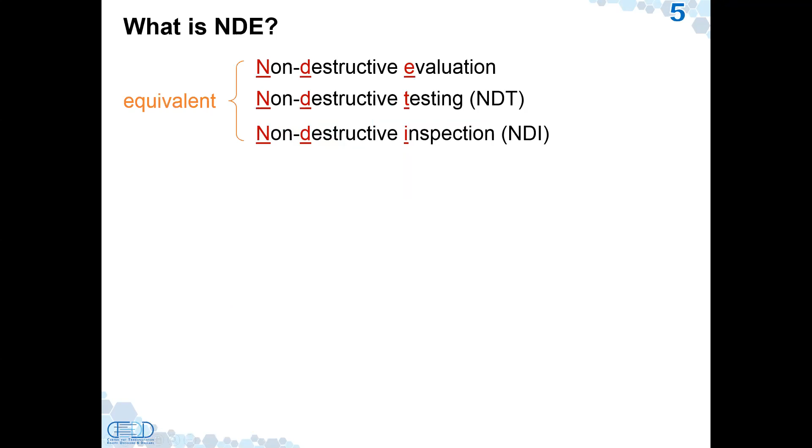For those who are not familiar with NDT technology, in my NDT class I introduce a little bit of background on NDT. What is NDE? Many people see NDE, NDT, or NDI - these are all the same concept, which is looking at damage or deterioration without damaging the material, like we do at the hospital. At the hospital we look at the problem - for example, a sonogram from my 8-year-old boy, or taking an X-ray, or some people use MRI for the human body.

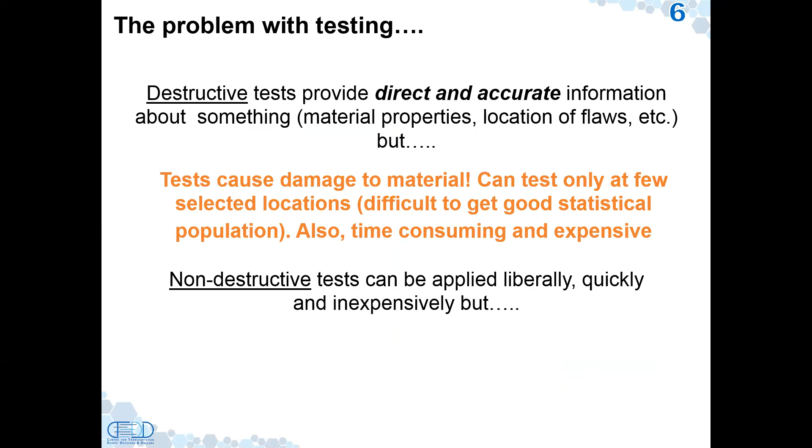Instead of the human body, we are looking inside infrastructure for deterioration using similar technology. Like at the hospital where people use blood testing, there's a lot of destructive testing methods too - 20 years ago I worked at a consulting company that used coring and other destructive testing methods. We also have non-destructive testing for infrastructure, similar to X-ray or MRI.

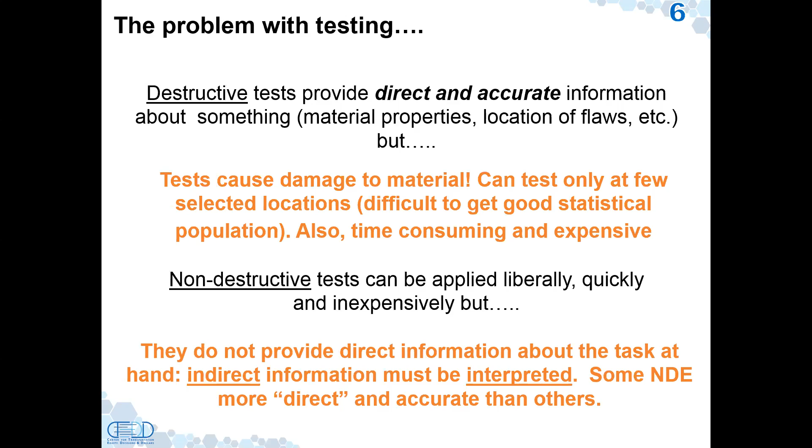So we investigate using these methods. These are our goals from our laboratory: we use advanced inspection technology to find deterioration, and using information technology, we share all the data and communicate with other stakeholders, or collaborate with other researchers.

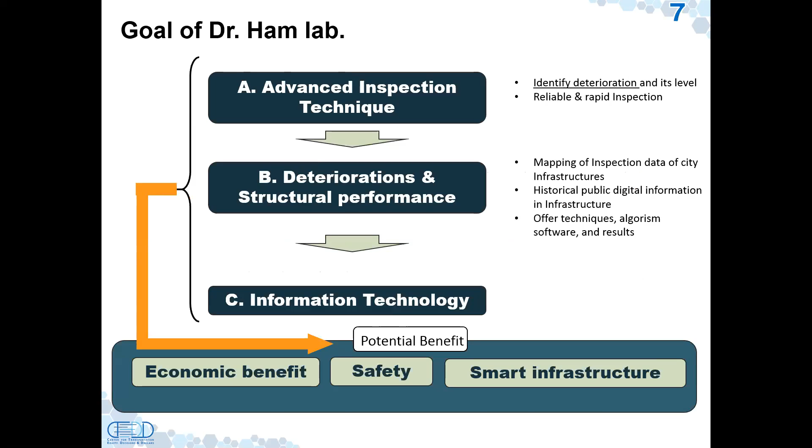These are our goals, and this project and my expertise fit into the three focus areas from CTEDD - for example, we do maintenance for transportation infrastructure, and we use remote sensing systems and information technology, which I will show you today.

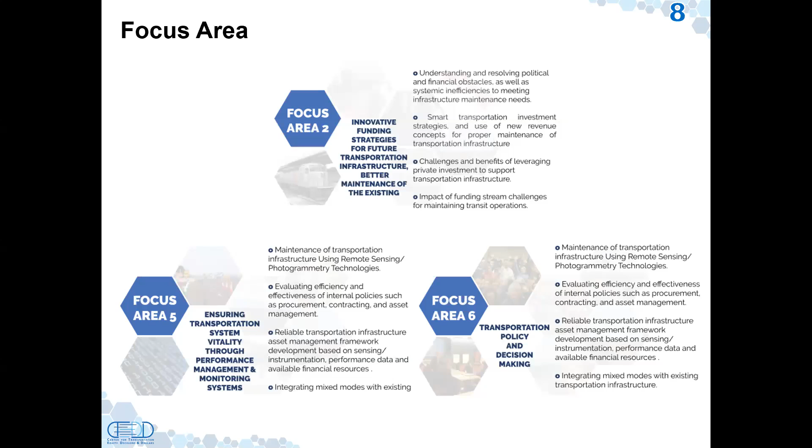And there's many topics fitting into these three focus areas, so I'll address those topics as well. And also, it's important these days, in the current project I have, looking at the deterioration or evaluating the pavement or bridge, because the stakeholder needs to know at the right time, because we don't want to overestimate or underestimate the pavement evaluation or bridge. Then you lose $1 billion, not $1 million, a $1 billion loss. So to avoid this kind of economic loss, we need the right-time assessment. This is kind of the initial motivation.

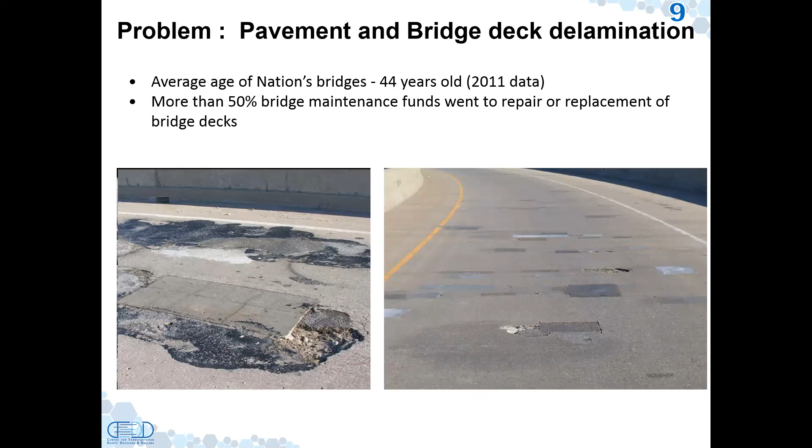So what kind of damage are we interested in these days? These are pavement evaluation and delamination of the bridge deck. Most of the damage issue in the bridge deck is delamination. This results from delamination caused by corrosion, mainly of the rebar. So look at this here, a pothole, or many kinds of damage out there. But most of the cases we see here are hidden cracks, which are called delamination, horizontal cracks. Again, this is caused by corrosion.

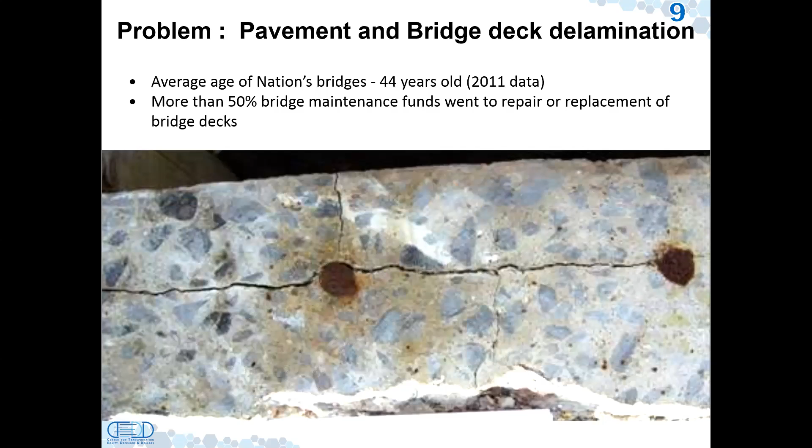So if you look inside the crack, many technologies try to do it with image processing or other technology, but they're not able to see inside this delamination. So this is the kind of impact of innovative technology: how we can inspect such hidden cracks. And delamination is the most critical problem in the bridge deck anyway.

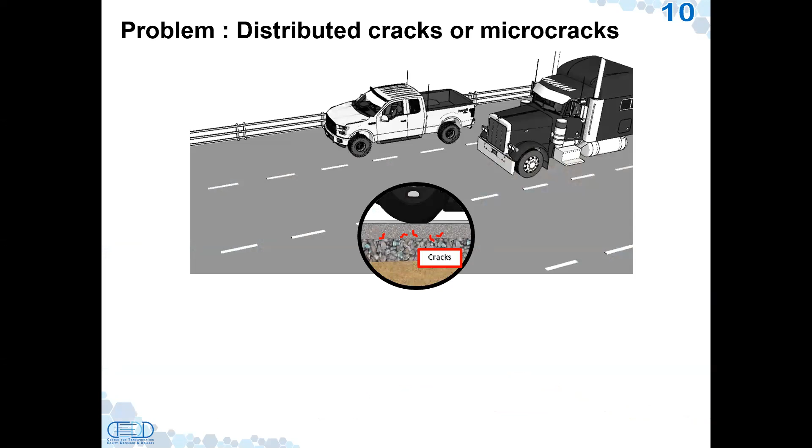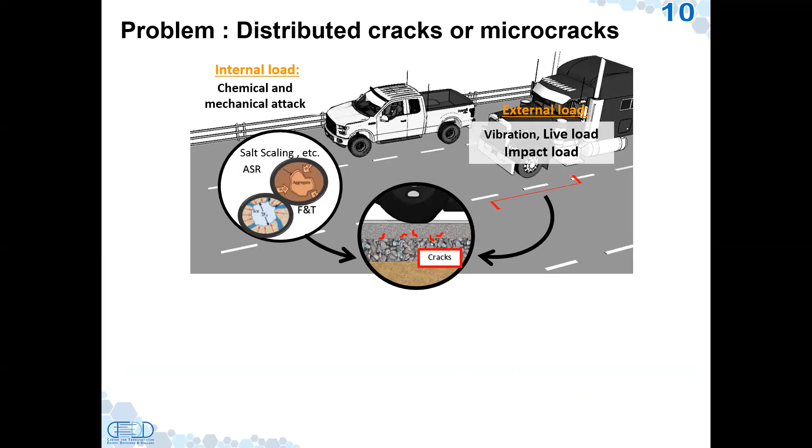And there are a lot of other macro or micro cracks on transportation infrastructure, for example, cracks caused by external load, vibration, and also chemical attack from ASR and freezing-thawing. For example, in Illinois there are a lot of freezing-thawing problems, and Texas has ASR and other salt scaling problems. So most times when I teach the PhD deterioration class, I call this the Fantastic Four, like the Marvel characters, because they really work as a team, and they kill the infrastructure anytime. These are a very good example of ASR cracks.

But of course, we don't want to find this kind of last stage, like you don't want to find a tumor at the last stage when it's too late and it's time to replace. So we want to find the early stage so you can fix it, or have a new strategy, or change the policy, so we can help our society's infrastructure.

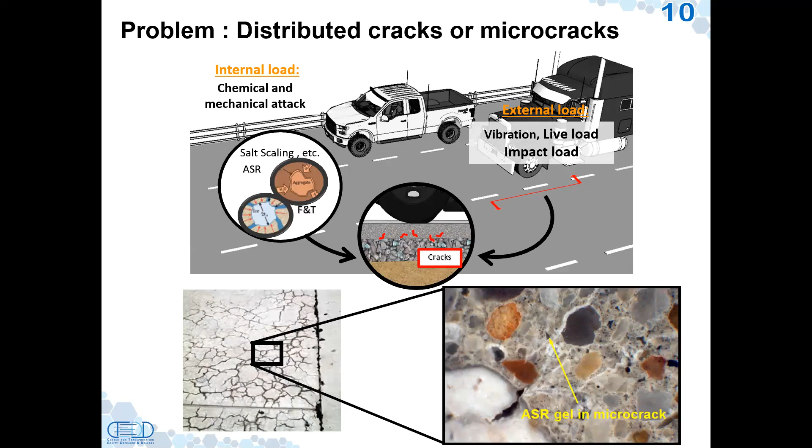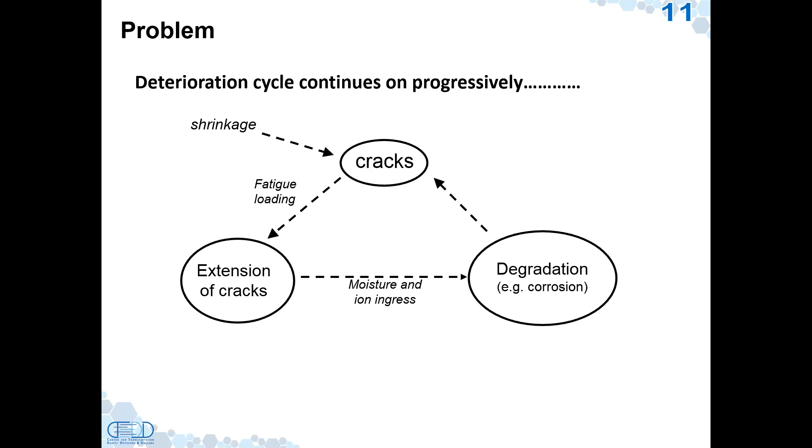So again, many people say the micro crack doesn't have a really significant impact on structural performance. Yes, that's true. However, if you look here, this deterioration cycle continues to progress. Like the Fantastic Four, they have teamwork, and then they have boosting. For example, if you have an initial micro crack, it allows chloride in, so the chloride ion boosts your corrosion, and then you have large delamination, and this delamination causes a pothole or vertical crack, and more cracks, and then it gets worse.

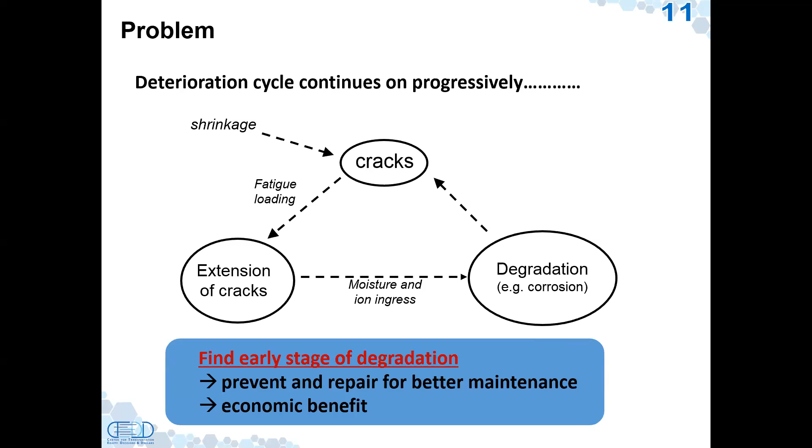So, like I said, like finding an early-stage tumor, we want to help find the early degradation, because you don't want to lose $1 billion on a wrong replacement, or be too late and have to do more and spend more time. That's why in most of my projects here and in other state DOT experience, they really need accurate maintenance data so that we can help.

So what is current technology doing so far? We have this, called chain drag impact. This is one of the commonly used NDT technologies to find delamination, chain drag. This method looks like an inefficient way, but it's the only way in state practice to find this damage. Of course, many people also try other advanced technology, but that's very slow. And this is still, believe it or not, a popular and common method among DOT people.

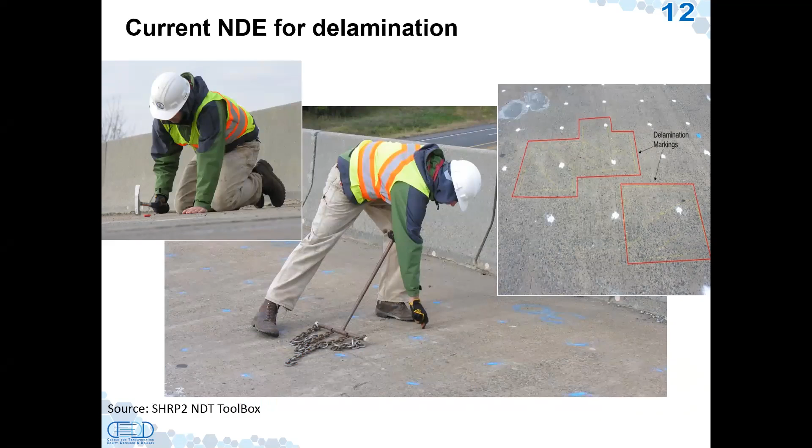So these are the challenges. For example, if you want to look at billions of concrete cross-ties or rail, or you have large infrastructure, and the method is not repeatable, not sensitive, and not fast, then you want to use some fast scanning system, maybe like an MRI system, and you also need some very sensitive method to find the crack.

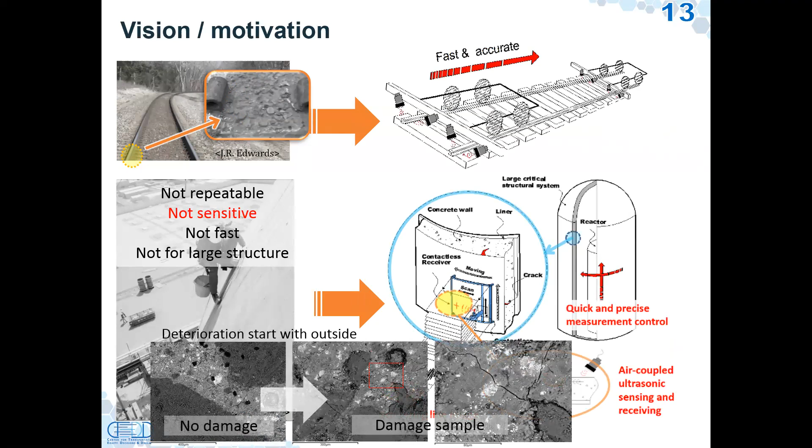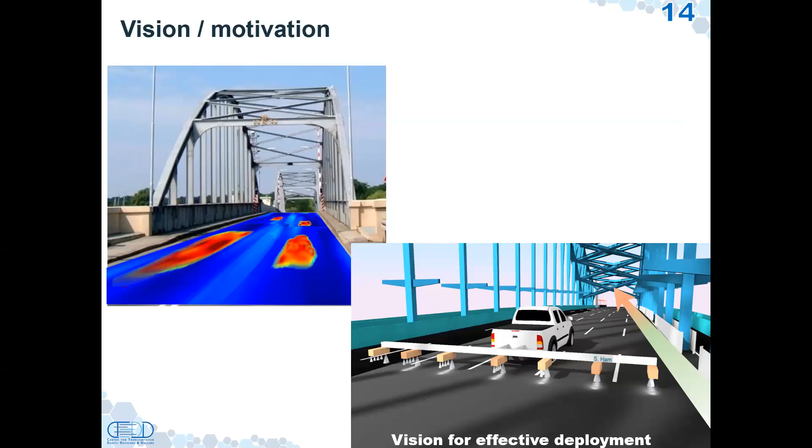Or somehow you want to profile with some rapid scanning system so that you don't have to close a lane, and you don't want it to miss any kind of crack. If you close a lane, you also have economic loss anyway. So you don't want to overestimate or underestimate, and you don't want to close the lane. So these are kind of the motivation.

We invented the one-side air-coupled, non-contact system. I'm going to spend 5 to 10 minutes on the background of why we chose the CTEDD technology, the project here. So this is the motivation: this extends my NSF project. How we got this NSF project, what topic we extend, and what research gap we still have to address.

The NSF project is a very deep-understanding research project, but CTEDD is more about connecting this academic research area to the stakeholders to use this technology. So I'm going to spend 5 minutes on the content of our previous NSF project and why we continue to study. Okay? So basically there are two reasons we got this NSF project.

At the time we wrote the proposal, there was no technology for a non-contact system. As I explained, you need a non-contact system; you don't want to contact the sensor every time you want to evaluate the entire system. Of course, many people use image processing and other non-contact systems, but those focus only on outside features, not the inside. And the inside is impossible.

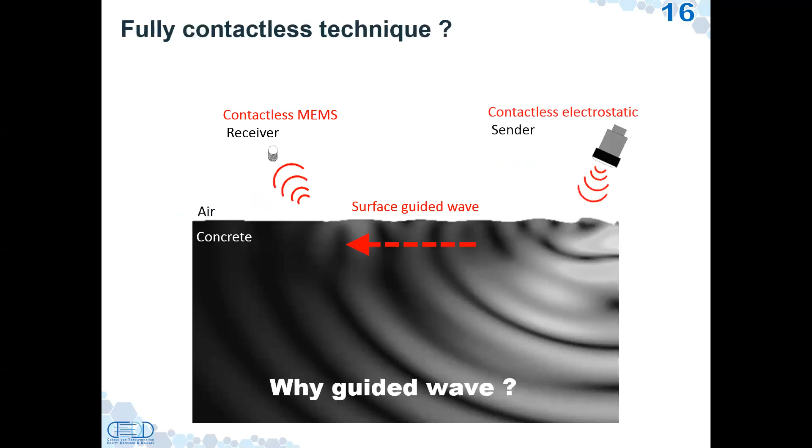That's the reason the reviewers chose this proposal: it's a very innovative, non-contact technology, which means we send the mechanical wave without touching anything, so we can evaluate the inside of the concrete or pavement. I want to skip a lot of this, but I'll just show you how we can do it. At UTA, we also develop and manufacture all the sensors here.

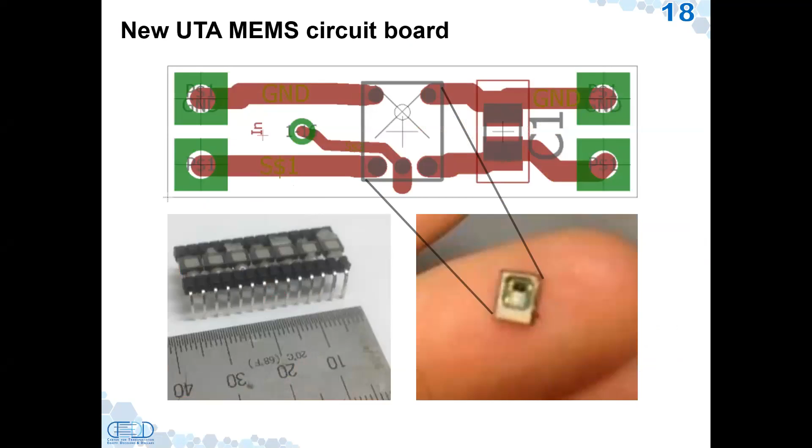Another reason we got this NSF project is that, although we have a non-contact approach, we needed an advanced and reliable crack measuring system. For example, many NDE techniques need a reference technique. In many field areas there are a lot of unknown cases: if you get a value, is that really the true damage index, or really the true crack volume?

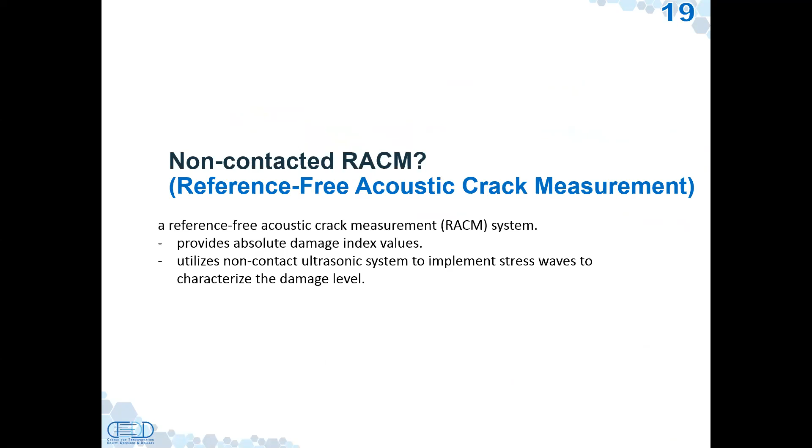So we really needed some kind of reference data, so that without any reference, if you just get the value, you can say this value indicates severe damage or not. That's why we wanted to develop this. For example, there are a lot of damage types here, which I took from different DOT projects, but let's focus on micro crack, macro crack, or distributed crack.

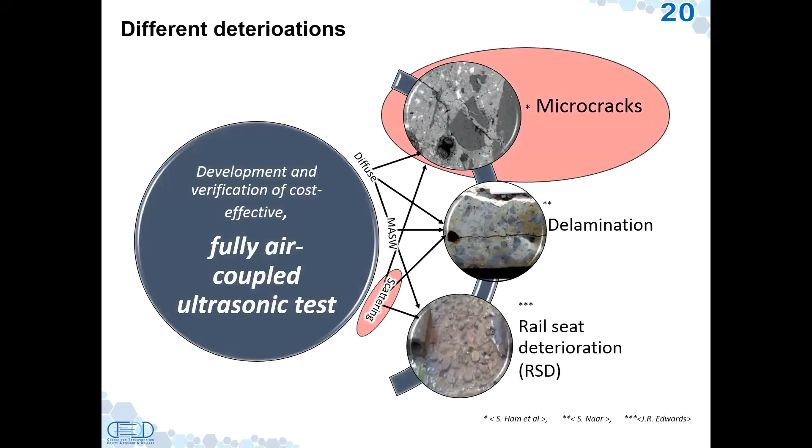If you look at this crazy inhomogeneous medium, let's say we have random cracks. I'm not going to explain all the mathematical equations, just roughly. Let's say this gray color is a little micro crack. We can detect the macro crack, but the micro crack is challenging because we want to find all the damage states. Usually we use a low frequency, which means large wavelengths.

Think about your bread flour sieve. If you have a large sieve, you can easily filter all this flour, but at the same time you cannot detect fine flour. Same thing: if you use a high frequency, which is a short wavelength, you cannot even propagate any mechanical wave through the concrete. It just goes away and scatters a lot. So we have to use large wavelengths.

And I want to scan small cracks. That sounds like it doesn't make sense; they contradict. Like diet chocolate cake. People believe diet chocolate cake doesn't work, but this proposal is an effective diet chocolate cake.

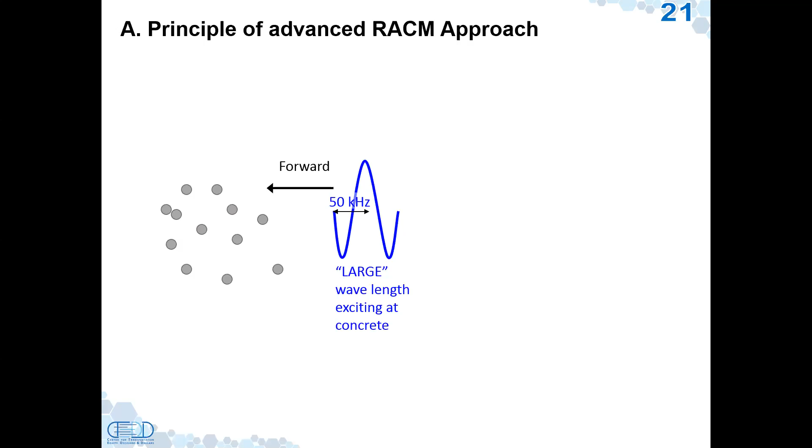So anyway, you don't have to remember all of them. You can remember just effective diet chocolate cake. I never use the diet chocolate cake in my proposal, but this is a good parable for steps. Anyways, all you can remember here is it looks physically impossible, but we can extract any kind of crack regardless of the aggregate type or concrete, whatever inhomogeneous medium. You can extract the crack from the infrastructure system.

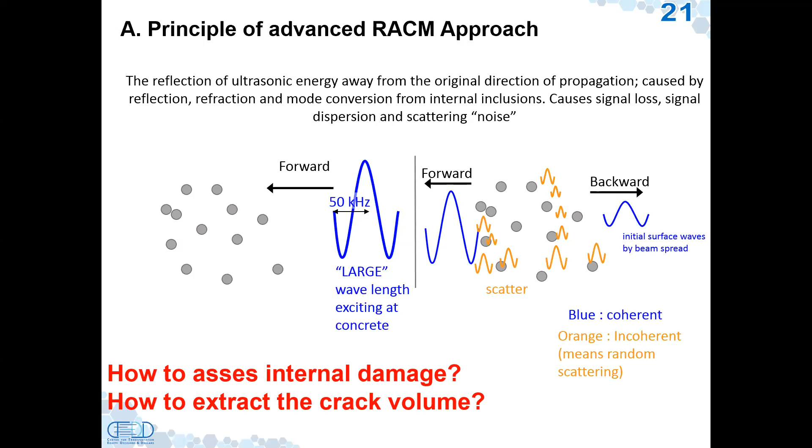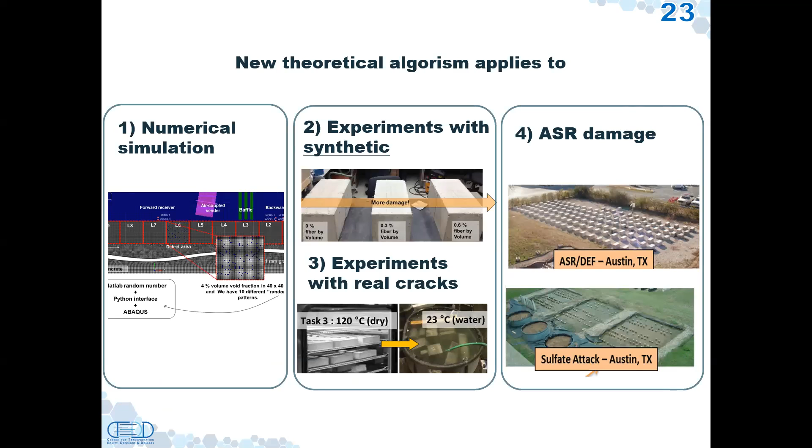So let me skip all the mathematical equations, but this is a part of my NSF project, and in less than 3 minutes I'm going to finish my preliminary results. Then I will start with our main CTEDD project. Before I start the CTEDD, we do have many kinds of studies using RACM technology. We do some FEM simulation and synthetic damage cracks, and also we have a lot of laboratory experiments here. The whole point is numerical or laboratory testing and some real ASR crack samples here.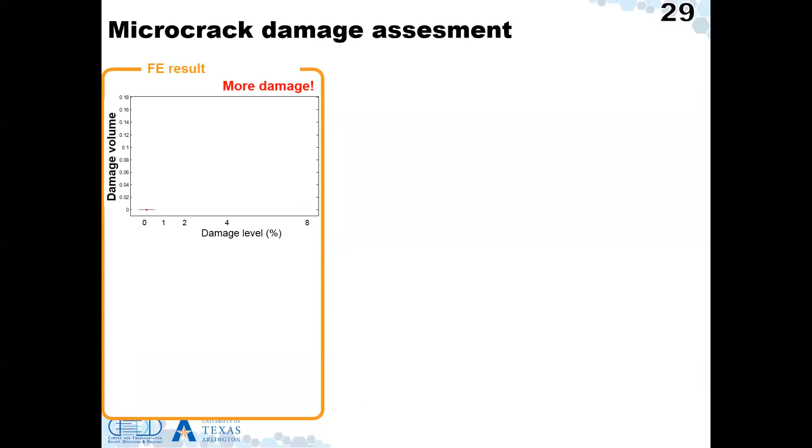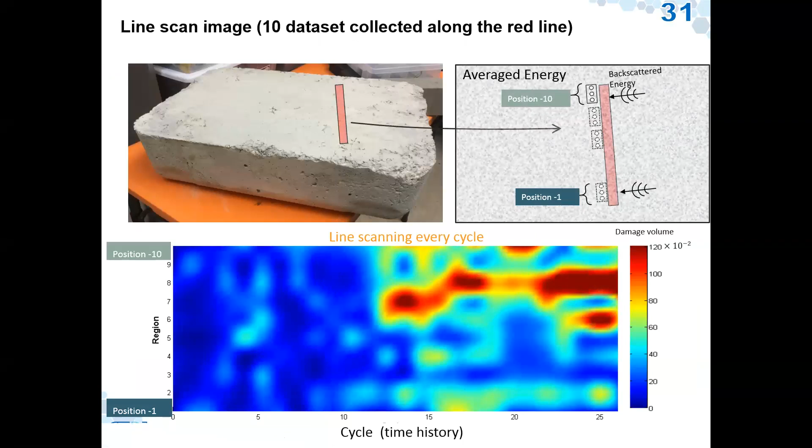All the results were good: we have a very low damage level, not the severe level, where other NDT cannot detect this crack, but we can detect this crack and extract the volume. That's the conclusion. And also we can scan the entire slab, then you can see the color indicating crack volume. The red color indicates more crack, and you can see the 0 day. And if it deteriorates more, you can see it popped out, and then more damage shows here.

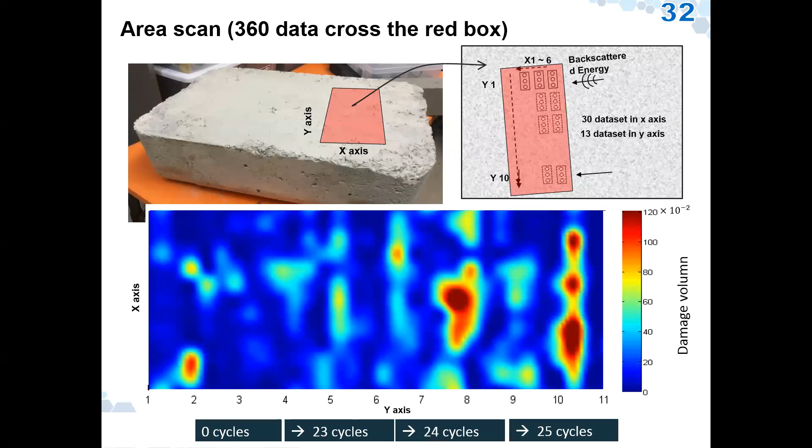So this is a really good application. Stakeholders, remember that we can use this technology for bridge decks or pavement. You can see all the time history of how this crack developed. And we can also give this data to other people, for example planning people or strategy people. They can use the time history for prediction and other technology in other systems. So anyway, this is the motivation.

Although we successfully finished our NSF project, there are several questions I have from this project. I want to share this technology so that everybody can use it. And also, no technology is perfect. We still have to improve it, but how can we improve? For example, what about the aggregate effect? How can you handle this aggregate effect? The conclusion is, regardless of aggregate type, you still get the crack, but there are still lots of questions about different types of aggregate, so we have to develop some advanced modeling so that people can continue to study this.

Also, the conclusion of this project was we can extract the crack volume, but how do we accurately extract the volume, or can we trust it all the time? There is lots of verification needed. And also, although this system is great and other NDT techniques are not comparable, as you can remember, all the estimation equations are so difficult to understand. So it's difficult to communicate with stakeholders and with other engineers. That's why this is the motivation to write the CTEDD project.

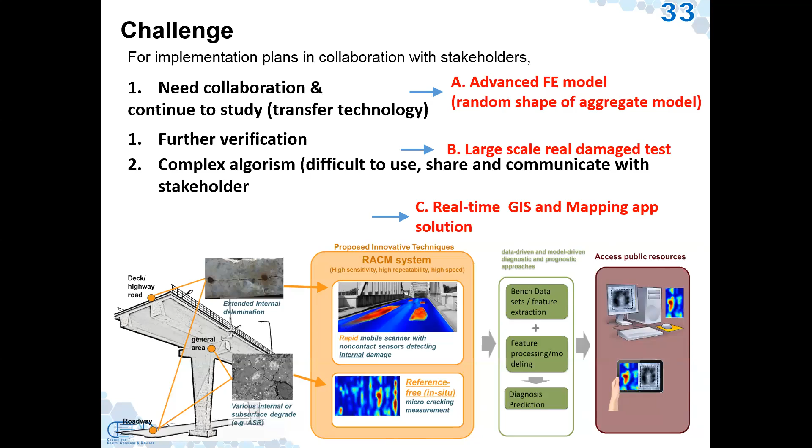So this is our vision before we do the project. Our purpose is that we can scan and inspect all the damage data, collect data, then analyze, and all the information goes through the app or web-based program, so everybody can see all the results and easily access them. Okay, so as I mentioned, we have three topics: FE new modeling, large scale and real damage sample testing, and also a real-time GIS and mapping system. So that's the whole thing.

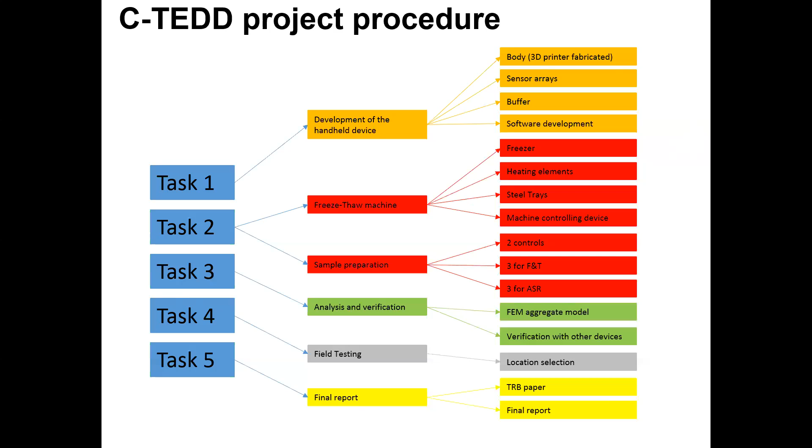And for performing this project, I have 3 PhD students and 5 MS students involved in this project, a lot of tasks here, and all my PhD students really did a good job, so I really appreciate that, first of all. We finished all those tasks, and here is each breakdown of the 5 tasks that we did.

So the first task was we developed the advanced FE modeling. Before we talk about it, we wanted to understand our RACM method and how this affects things, because our lab has a lot of questions to understand this method beyond our NSF. Then we wanted to find some aggregate effects. So we were seeking aggregate modeling, because realistically, if you cast the concrete, you cannot control the shape or the aggregate location, so it's impossible to compare to each other. So that's the motivation.

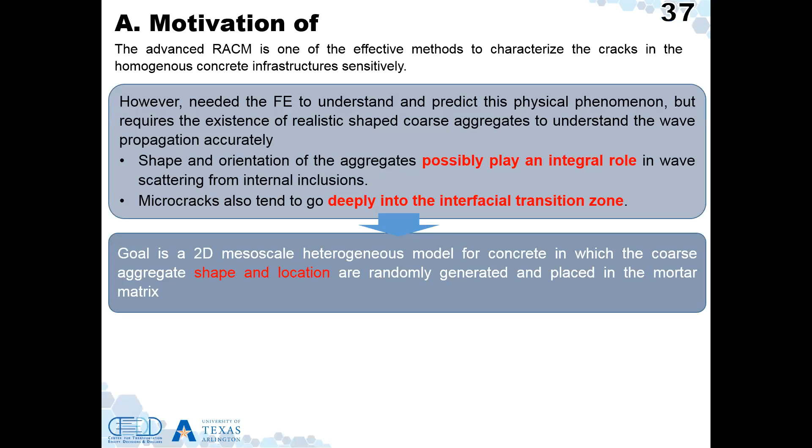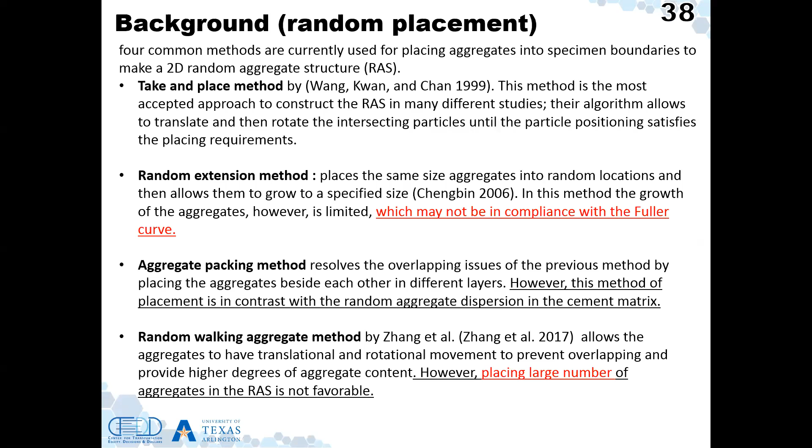We developed the aggregate model. I'm going to skip the detailed literature review, but even in current 2018 projects, most people focus on how to image with an iPhone or camera, how to make a digitized image from the actual real aggregate, but that's not our purpose. We wanted to generate randomly, but it has to be close to realistic aggregate shape. Many morphology-based papers use equations, and none of them is close to real aggregate samples, so we decided to develop our own code to simulate realistic shape.

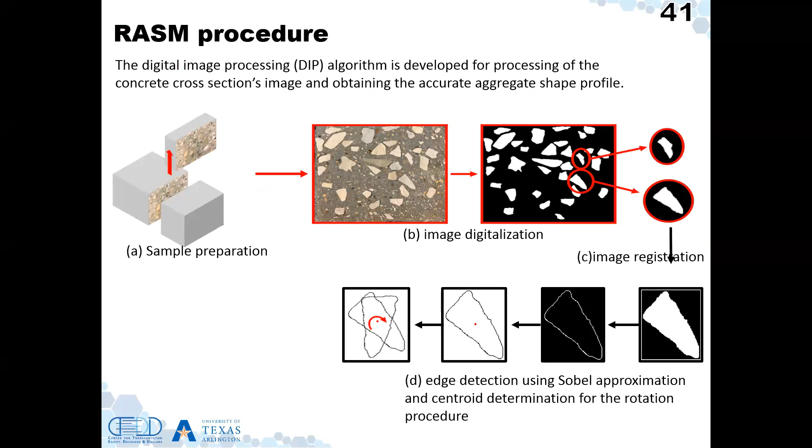This is very practical actually. What we do is slice all the samples, take a picture, and digitize all the images. We have more than 1,000 aggregate profiles, we check the similarity, and we make the profile of each aggregate. After we profile and collect all of them, we made a shape function for each category. Before that, we did a lot of statistical testing and analysis to categorize needle, crushed, and round, because with the previous technology we could not create all 3 shapes easily.

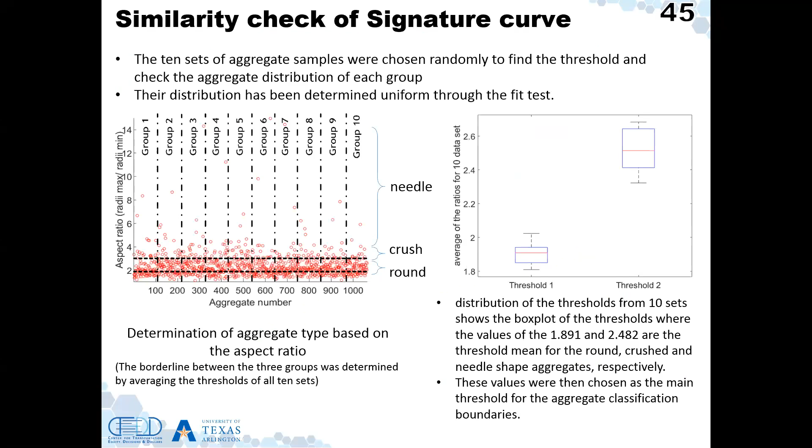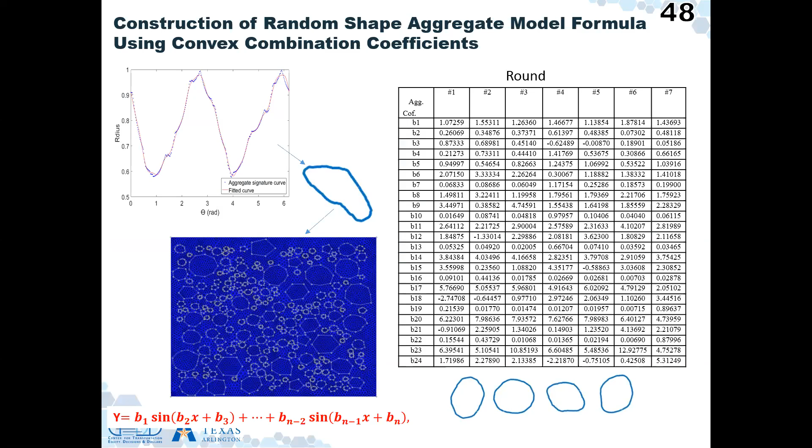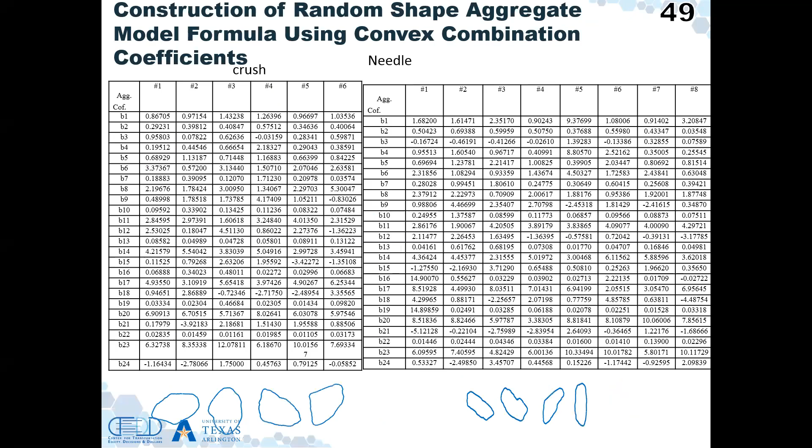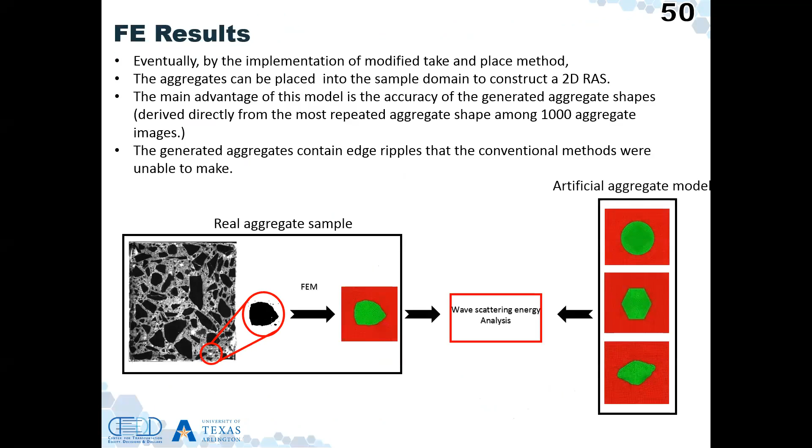So that's the whole point, and we have 3 categories: round, needle, and crushed aggregate shape. So we can create all aggregates. We already verified this; we'll skip it, but basically we have the model directly from the imaging, and we used our own code to randomly generate the same category. We also compared with aggregate shapes from other researchers.

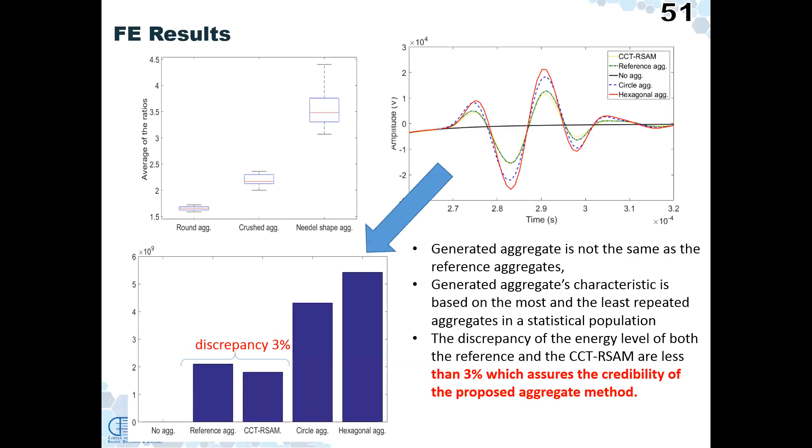So if you look at the reference aggregate or CCT, these two are from the actual image, and this is from our code. Whenever you use the table and this equation, it fits within the actual image. So we verified many steps here. If you have any questions, let me know, I can explain in more detail. But the whole point is our model is very close to the actual image of aggregate.

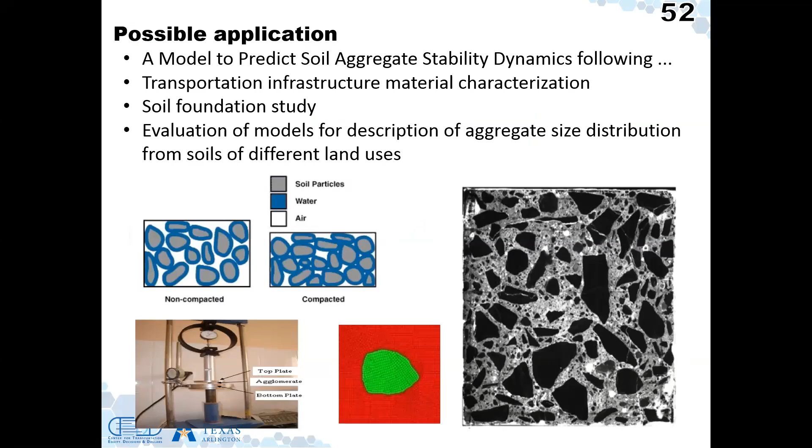So you can use this kind of aggregate modeling for many things. For example, many DOT people are interested in soil compaction and foundation, aggregate shape and aggregate modeling, and also compression testing. We can use it for prediction of soil aggregate stability, material characterization, or foundation. So this technique can be used in other areas as well. I hope many people can use this technology.

So after this modeling, once we understood this method, in the last 2 stages we tested real damaged samples, and we also did mobile app development.

So first thing, although we have many laboratory tests, we still have a lot of questions: how about the different damage types, for example, freeze-thaw or ASR, or other damage? How sensitively can this RACM technology measure the crack, and how can we extract the volume correctly? So we need some further verification with other NDE technology or laboratory testing before we go to field tests.

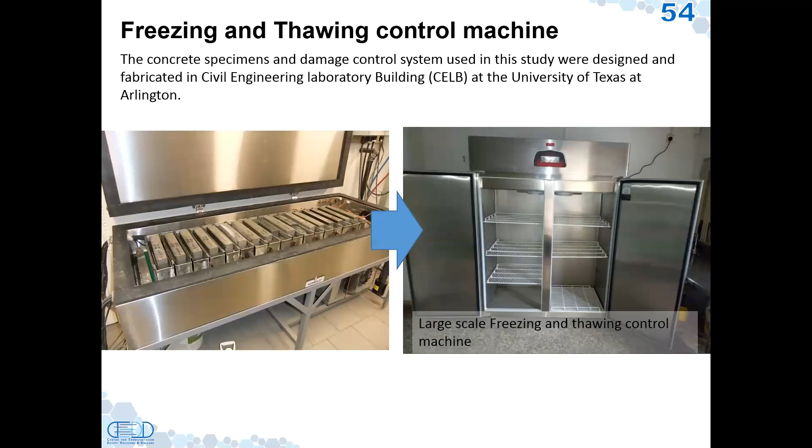So we were looking for an environmental chamber, but no one can do freeze-thaw for a large sample. That's why we developed our own environmental chamber. We call it the large scale freeze-thaw machine. It's good for other applications, for example, how the crack propagates in winter time, or other temperature effects. So we can use this machine for many other applications.

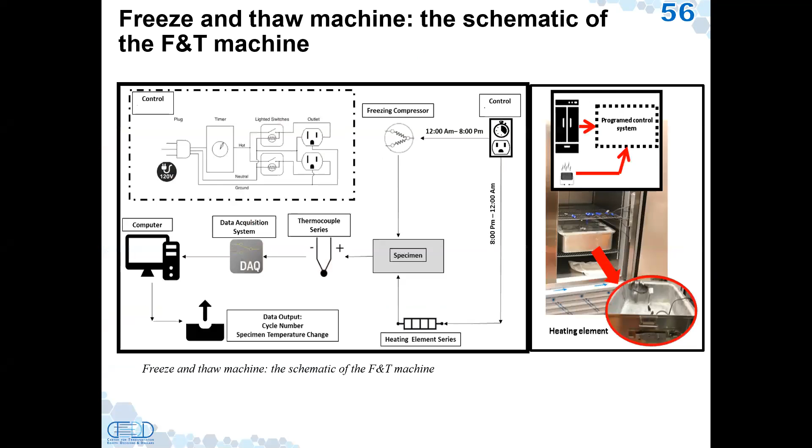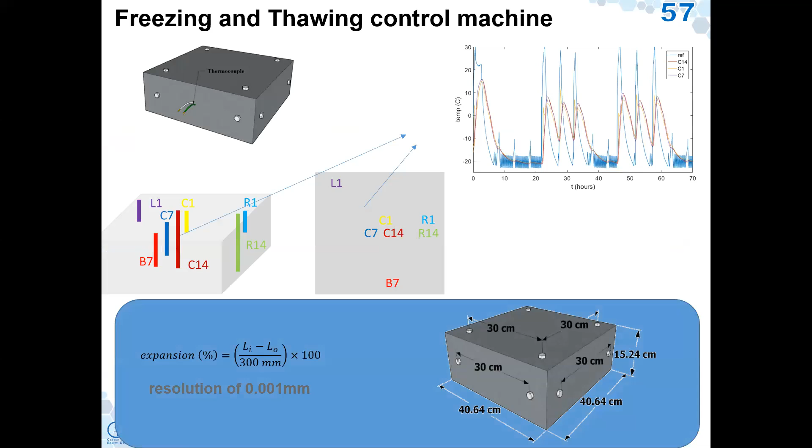So anyway, these are all the configurations of the system we developed. We have a control system, and I'll just roughly skip this page. Basically, we have a freezing and thawing cycle every day, so we can make real damaged samples here.

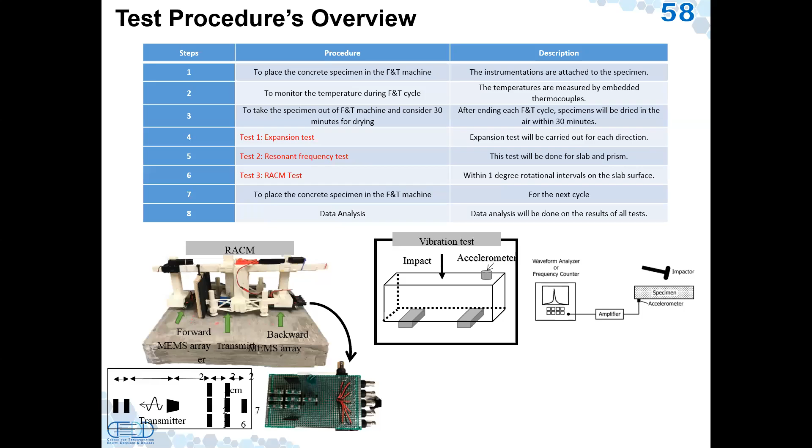Before the crack testing, I'm going to introduce a couple of methods. This is our non-contact RACM method, and the right side is the traditional vibration test called resonance testing. This is very traditional and very reliable, but only for small samples. You cannot test on a large scale or in the field. But it's really good as a reference, and our technique can do any size. That's why we can monitor infrastructure systems. We also use 3D tomography. It's contact and slow, but it's a good technology to compare.

So the first step is we measure the extensometer data. Think about when you fill water in a container and put it in the freezer. Sometimes you get a crack because the volume inside increases. Same thing: if you have internally distributed cracks from ASR or freeze-thaw, the structure's volume increases. So we measure with a very sensitive extensometer. This is reference data we compare.

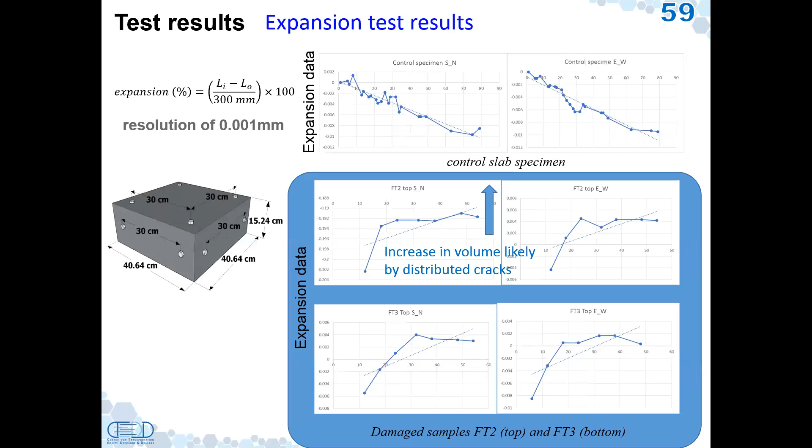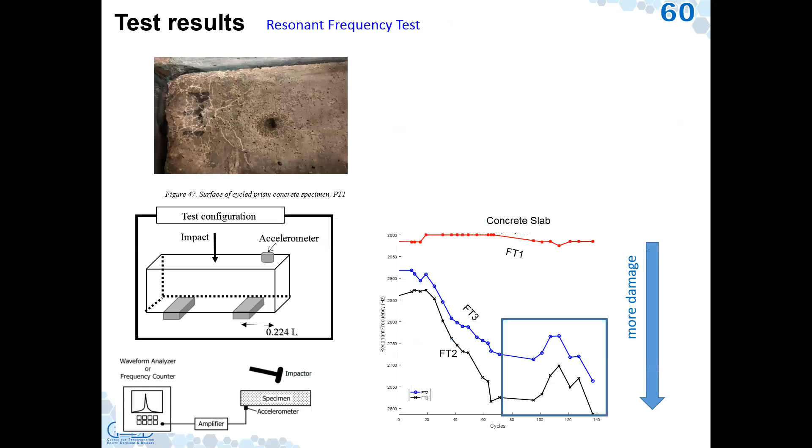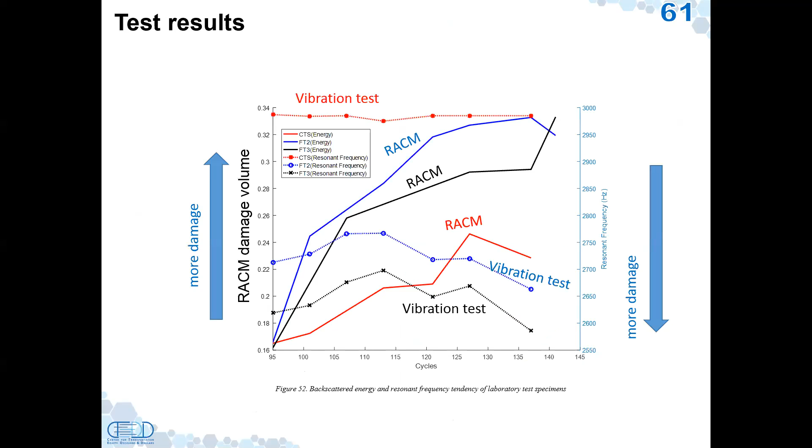So the whole point is that with the vibration test, you can see it is not accurate as the damage goes to a high level. That's the problem, you cannot detect it. But our RACM increases, meaning you have more crack volume, so you are able to see the crack development here. So this roughly shows you that our system works.

And you can use it in many other applications if you're interested. You can monitor other deterioration, or when they replace with a new material that may have shrinkage, dry shrinkage, or initial cracks, we can keep monitoring because you can scan the entire pavement quickly. We can use this technology for soil compaction, or to see if there's a foundation problem. We can use this scanning machine to see if there's any void and extract the volume. So if you have an interesting foundation area or soil, let me know.

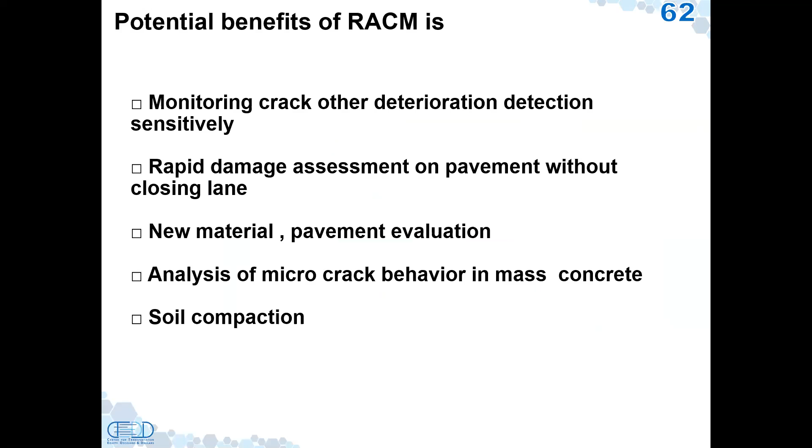Okay, so finally we have the last stage here. Although this RACM effectively finds the crack volume, it's still difficult, with many complex equations and difficult algorithms.

Our idea is how we can share this data, how we can communicate, or how people can easily access it. That's the motivation for developing this system. For example, this is a design sketch of an Android app that everybody can download, the SMTL.apk, where we have damage samples you can access anytime.

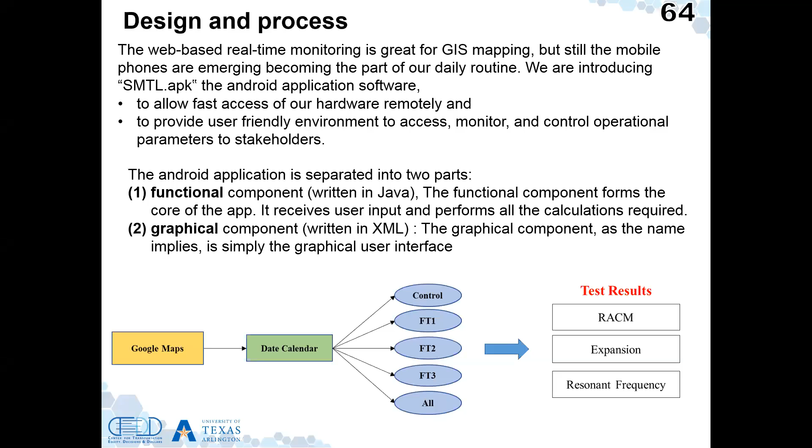You can choose different NDE methods to compare each other, and day by day we can always look at all the data, not just the field laboratory data, but all the field data. You can easily see what's going on. For example, you choose the app, choose the location, and it pops up all the information. This is the kind of instruction for using this application.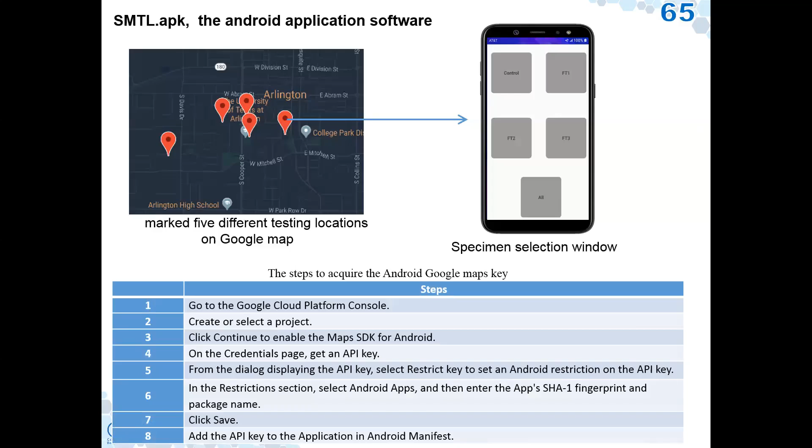Let's look at this. We have a couple of field tests using these technologies. For example, near the UT Arlington area, we constructed a pedestrian pavement and have an old pavement there, so we can easily compare them.

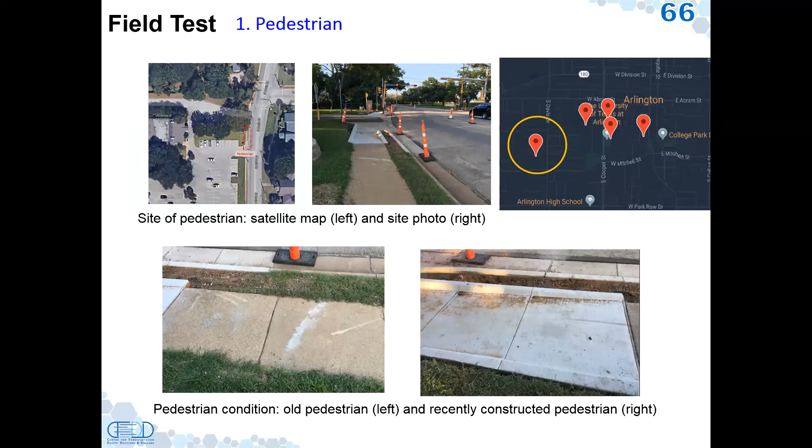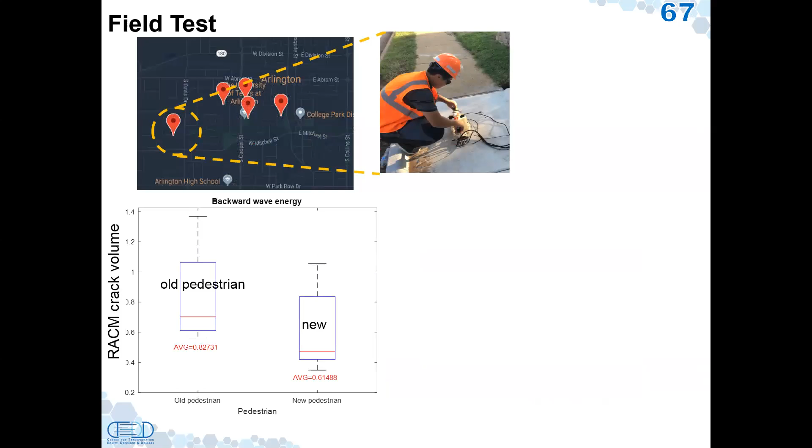We don't know exactly the volume of the crack, but based on our laboratory testing it's pretty accurate, so we can compare these two. If you look at the RACM result, you see the damage volume increase in the old pavement while the new pavement is less, but they probably have dry shrinkage, a small or big crack too.

Our 3D tomography isn't really helpful for finding the crack, but you can see the anticipated thickness. This red color indicates the thickness of the pavement.

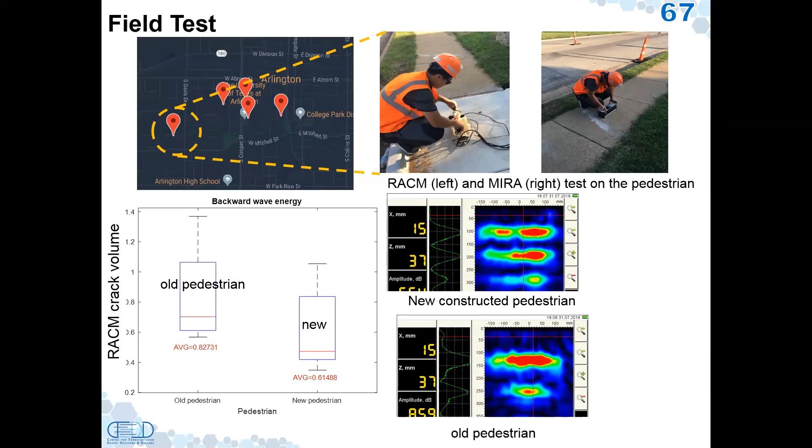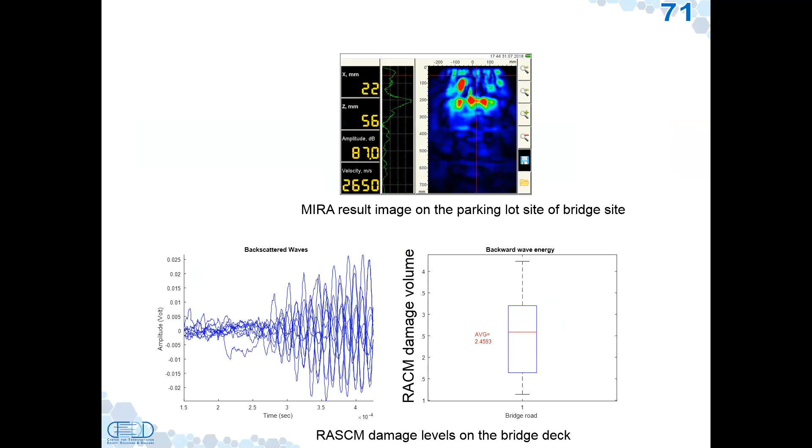We repeat the same thing at many locations. We tested the parking lot and got all the data there, and also did testing for a bridge deck, getting all the data. We developed a web-based platform and mobile app platform as well.

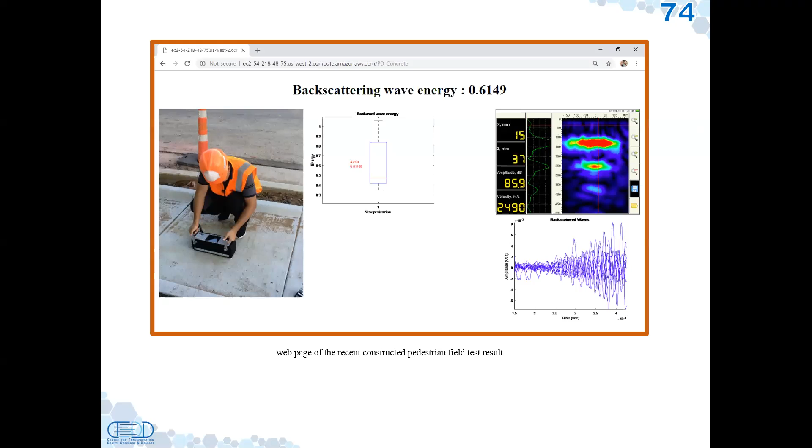Once you click the button for a location, you can see Monday's testing, Tuesday's testing, all the photos and data, and our RACM data. Many people can access the data anytime, and if you test daily or monthly, you can always track the information, so we can discuss how the infrastructure is damaged and communicate with other stakeholders.

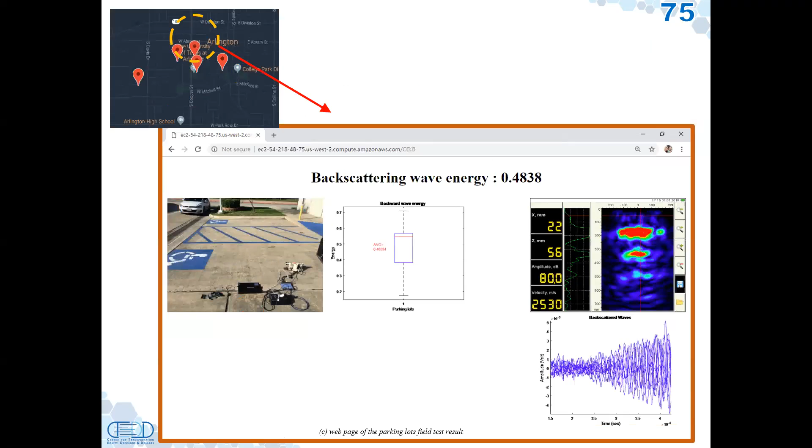These are just examples, and this is actual data we developed. I already explained the bridge deck field testing, parking lot field testing, and pavement field testing. All the data is already saved here.

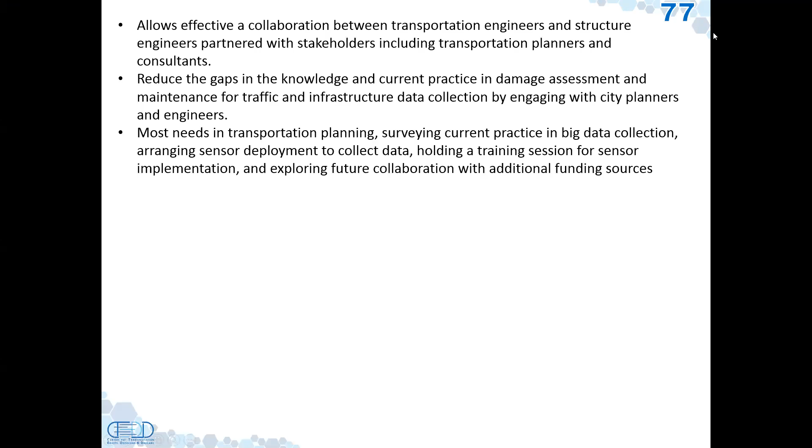So the conclusion of this CTEDD project is that we're able to access all of this, access all the field test areas, and extract all the cracks. But this technology can transfer to other areas, such as what we developed recently after the CTEDD project.

We developed a mobile scanning system to do runway pavements, because we wanted to investigate and help the stakeholder understand how much damage there is, since they don't want to underestimate or overestimate and lose a billion dollars. Currently we use this technology to help this other stakeholder.

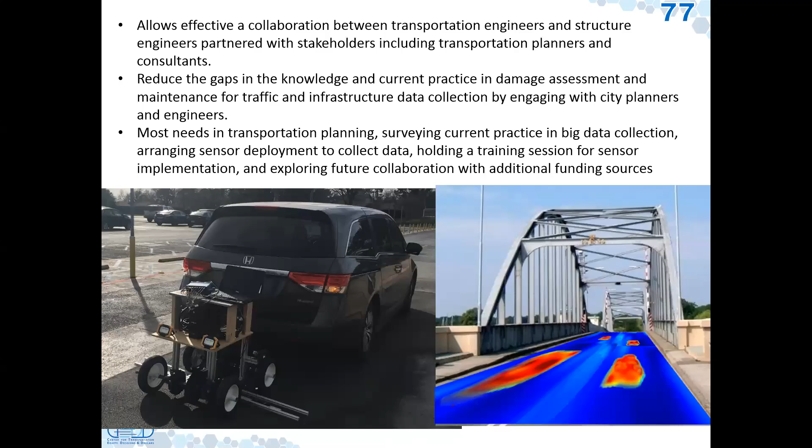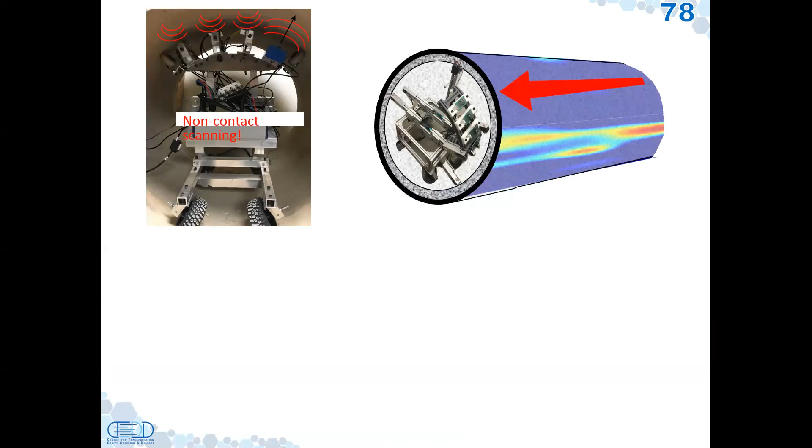We also have a similar project using a robotic scanning pipe system, because we have an entire large complicated pipeline. This robotic system is non-contact, so we can investigate other areas as well.

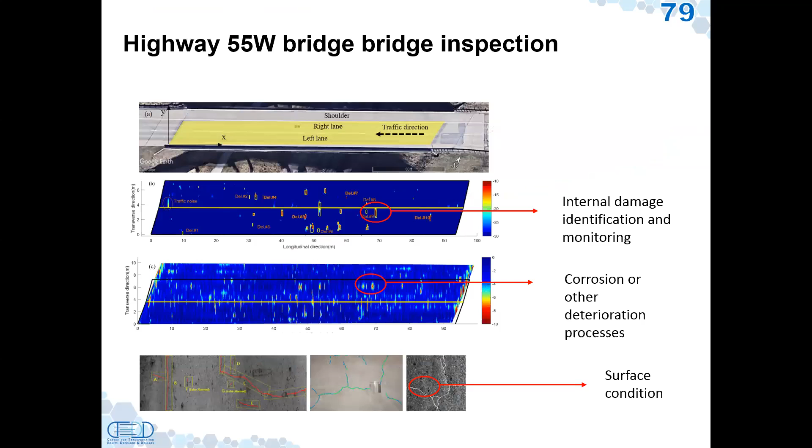Or we have a manual bridge scanning system. This is previous data from a DOT project where we identified internal damage, corrosion stage, and surface cracks as well. The internal crack detection is very unique, because other technology like GPR or image processing cannot detect internal damage like this.

This is our future work. Four or five years ago we initiated this augmented reality, or AR, technology, because although we have a web-based system, we still had questions about how the repair or engineering team could identify the exact location and communicate in the field or office. So we adopted this augmented reality system to record all the 3D data and all the complicated NDE technology into our system, so everybody can access it in the office or go there directly.

So the engineer team goes there, they find the exact location of the defect and how we can core it, because they also need the coring, which is like blood testing in the human body. You want coring, and then you can see that here. So this is really helpful for communicating with other stakeholders or teams.

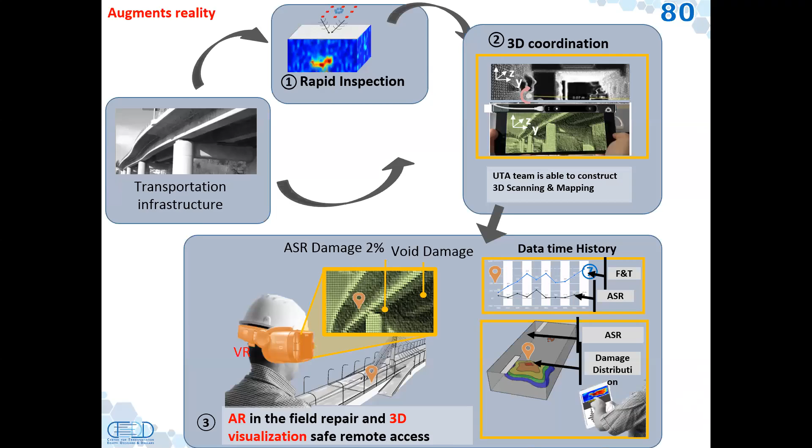Anyway, thank you so much for attending today, and I appreciate the technology, CTEDD.